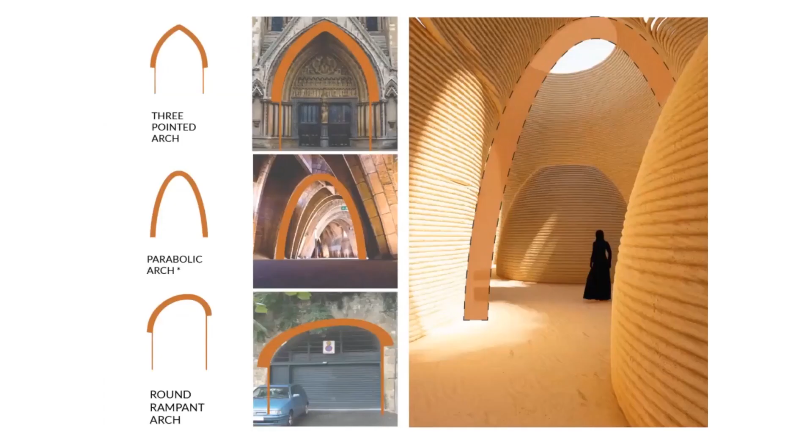What's going on, guys? What's going on? Welcome back, man. So tell us, what does your thesis studio focused on?

We didn't have a really specific focus. Our professor instructed us to really take the opportunity to explore whatever we wanted. For me, I wanted to focus on something that could be used by some kind of nonprofit organization, something to help refugees. That was gonna be my focus.

Sounds like a powerful topic, man. Great. So I titled it The Sahara Refuge, with this quote: trying to translate fine-grained desert sand into a viable building material. This could open up the possibility for a contemporary settlement dedicated to displaced peoples of the Sahara Desert. So that's what it turned into after I refined the idea.

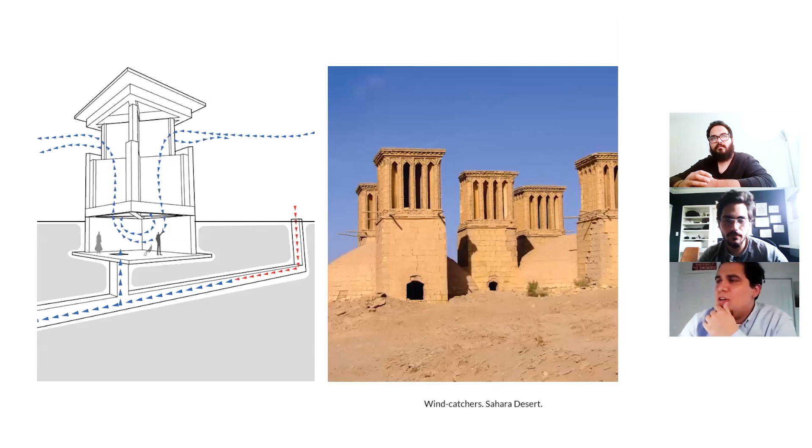This ended up being a form that I tried to emulate, like the primitive structures—how they're focused, built with mud and straw to kind of hold it together.

So this Ocean Sole Africa—he takes flip-flops that wash up on the beach, and he's able to carve them into sculptures, and that turned into a business. He sold them online, got a lot of people involved, so now the community helps him make these sculptures, collect flip-flops, with this entrepreneurial spirit, I guess you could say.

So I wanted to focus on a sustainable material that you could use to create these settlements.

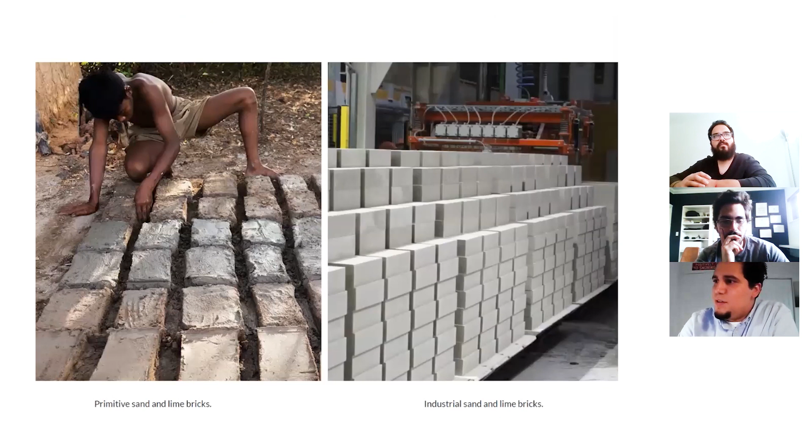In the Sahara Desert, sand would be the most abundant material there. If you look at these primitive bricks, they use sand and this powdery substance called lime, and they mix that together to create a pretty strong enough brick that can give you a simple structure.

That process has kind of been modernized. These factory productions you can see on the right. There's people researching ways to use it. I'd say the issue with the desert sand you find in the Sahara is that it's too fine grained, so it can't really bind well together with any adhesive that you use. It does take a little bit of research to figure out how to use it.

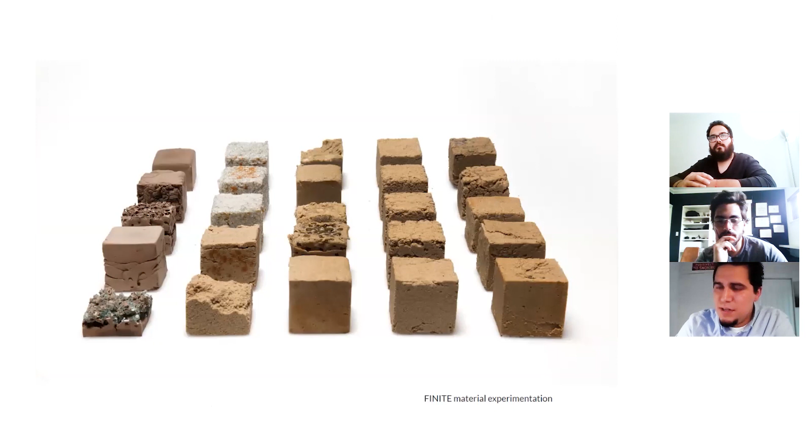These guys have gotten pretty far and I was trying to emulate their process. So I started making these little small samples. These ones here are just sand, water, and lime, and they hold together well.

I ended up doing pressure tests with them to see how much weight they could support. There's this kind of spectrum I set up here to show - on the left, that's just sand, water, and lime. The second one in, I didn't use any water to show how essential that ingredient is. In the middle there are equal parts of sand and lime, which I found to be the most successful.

And all the way to the right was when I started to incorporate cement, because if you're just using sand and lime and water, it can't cure - so if water hits it again, it's going to melt away. That became an essential thing to figure out, how do you get the sand material to cure. In the meantime, I was just using cement as something to kind of keep the experiment moving forward.

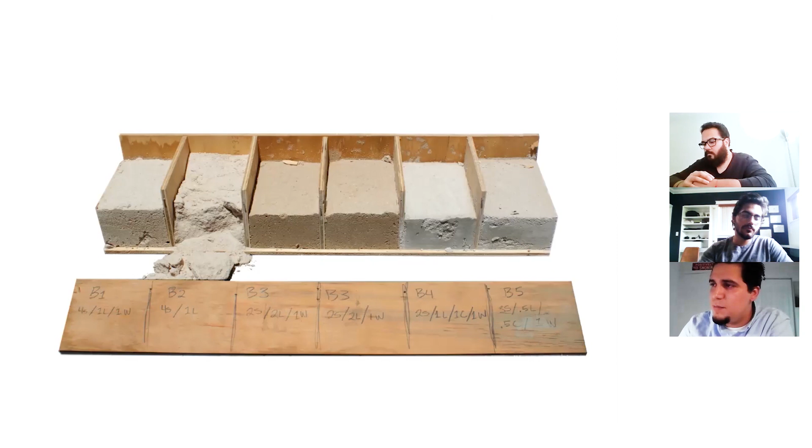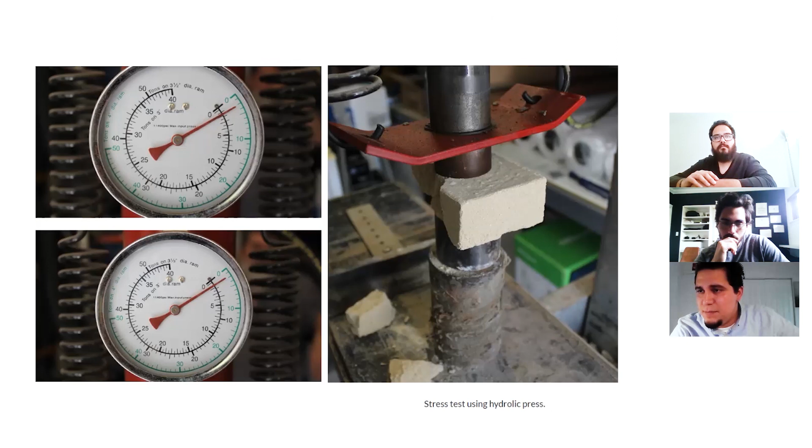So I did these pressure tests. We had a hydraulic press at the studio, so I was able to use that. And even the sand and lime solutions were able to support more weight than I suspected. I think I didn't write it here, but at this gauge you can kind of see it was getting up to a couple tons, if I'm reading it right. So that was a shock to me.

Some details of that, and I kind of broke it down. I think I explained this in depth during the presentation, but I'll go over it now.

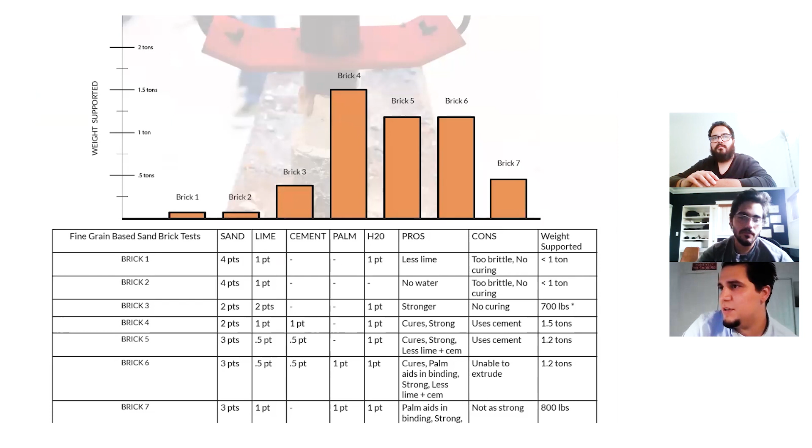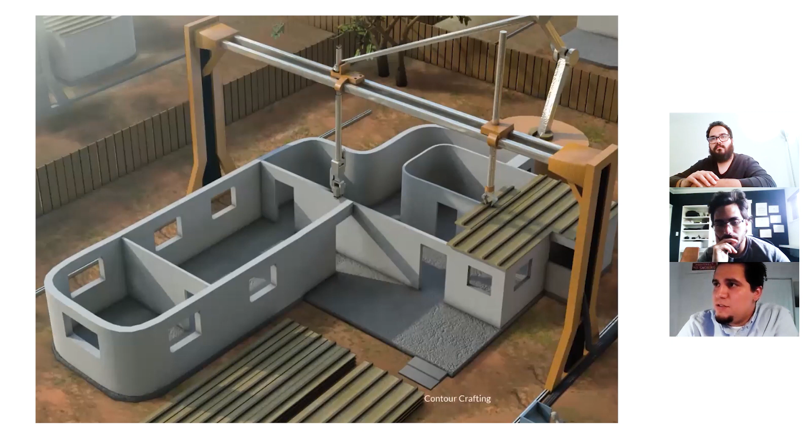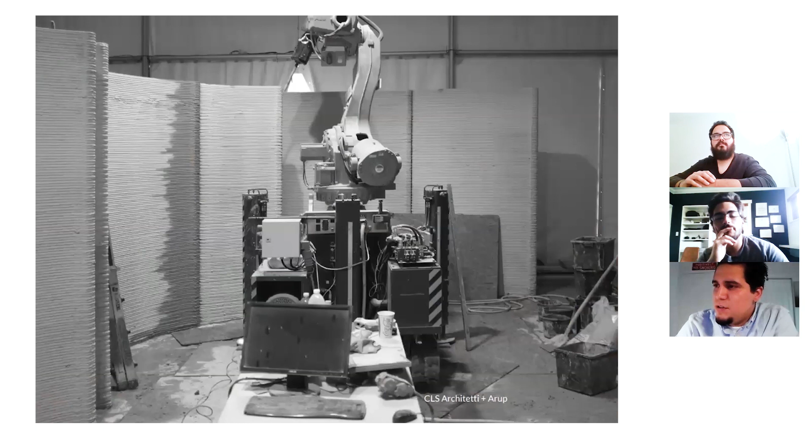So I looked at robotics and construction as a way to use this material, as a way to actually construct these settlements. I looked at a lot of people who are pushing this robotic construction forward. These contour crafting guys have these large industrial scale printers and manufacturers, so I have a lot of research going on in that. This is an Italian group that used robotic arms.

They were able to produce this structure in only 7 days, so these can actually be put together pretty rapidly. And at a sufficient size, 100 square meters, that's enough for maybe a couple people or a small family.

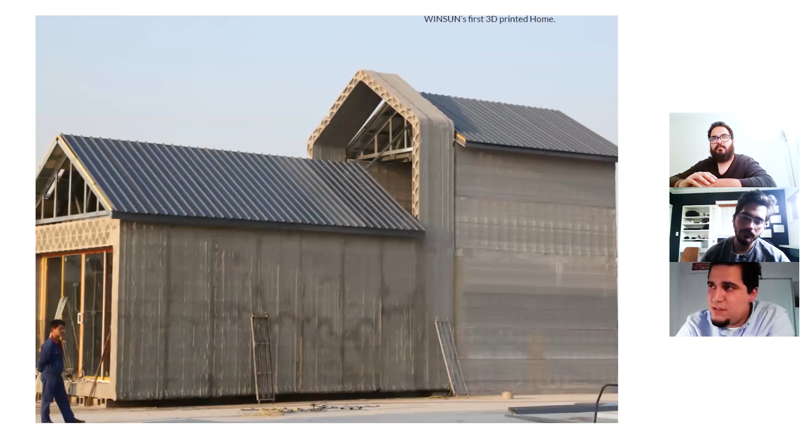This is a Chinese company that was starting to 3D print houses, and they've gone really far. They're doing townhomes, whole communities in a few months. There's a lot of progress being made there.

So I broke it into two options for the plan: you take the sand and whatever adhesive you settle on, combine that with on-site industrial scale robotic fabrication, and then you have your shelters. Or you could fabricate these off-site in factories as segments, and then use robotic construction to put these prefabricated elements together on-site.

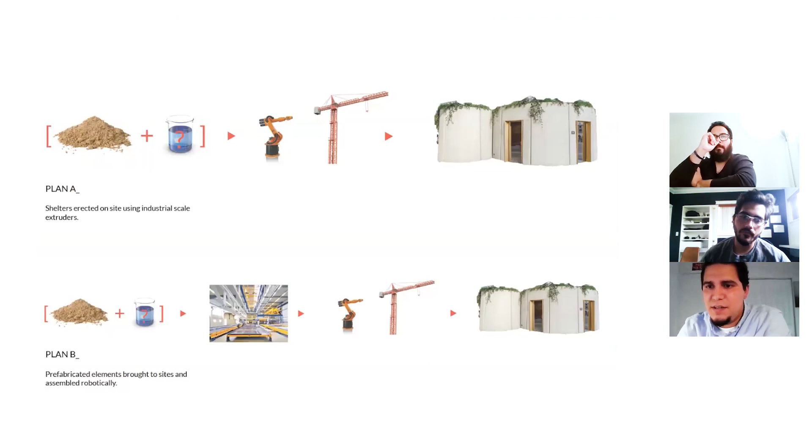So this was kind of the image that started to reflect the settlement - something that could be robotically printed and start to create an environment where small ecosystems for landscaping and agriculture, craft can kind of be housed.

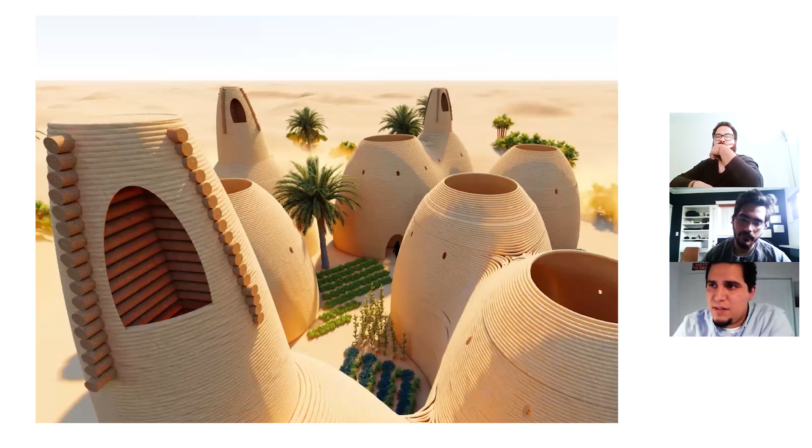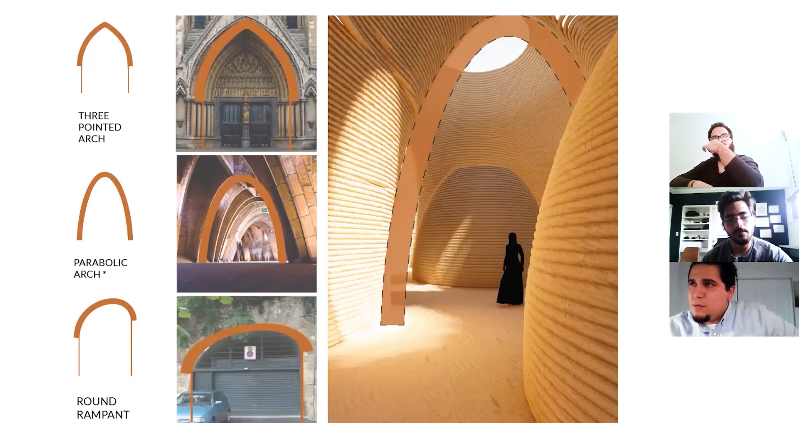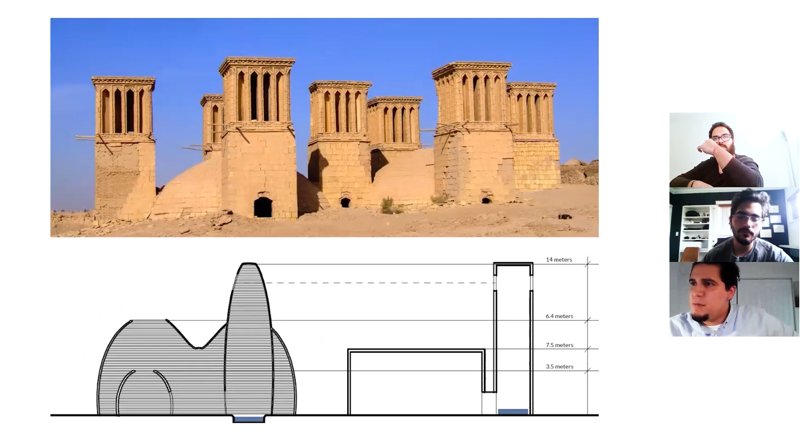I was looking at structurally how these things would work, incorporating different forms of arches that can come together to support these things, and then tying back to these wind catchers, trying to maintain the scale of them and how they work.

To show a few diagrams, at the bottom right you can start to see how that cooled air is coming up through the ground and the hot air coming down and cooled through the towers.

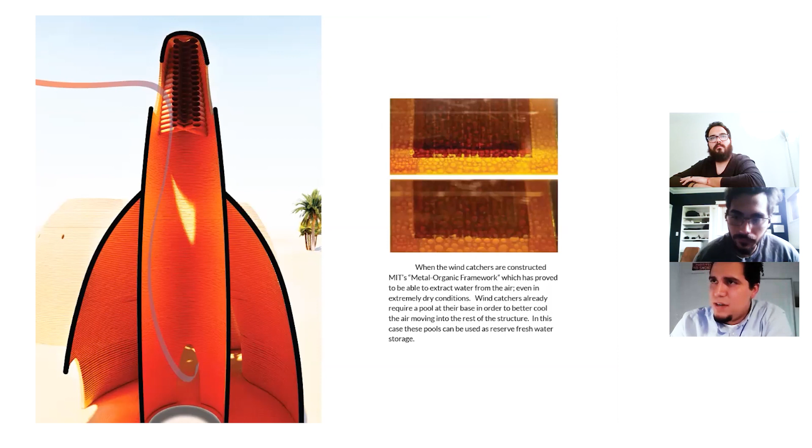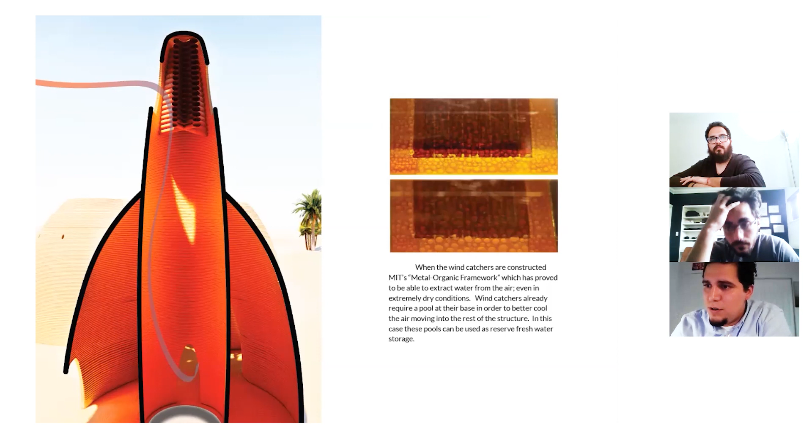I was looking into different materials that are able to absorb water from the air. If you're in the desert, water is an issue. If you have this air coming down, even though there's little humidity in it, you're still able to capture water, maybe store it at the bottom and start to create these reservoirs.

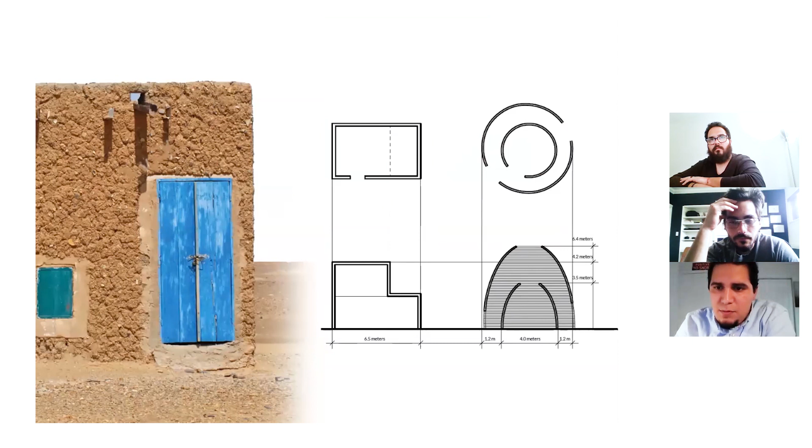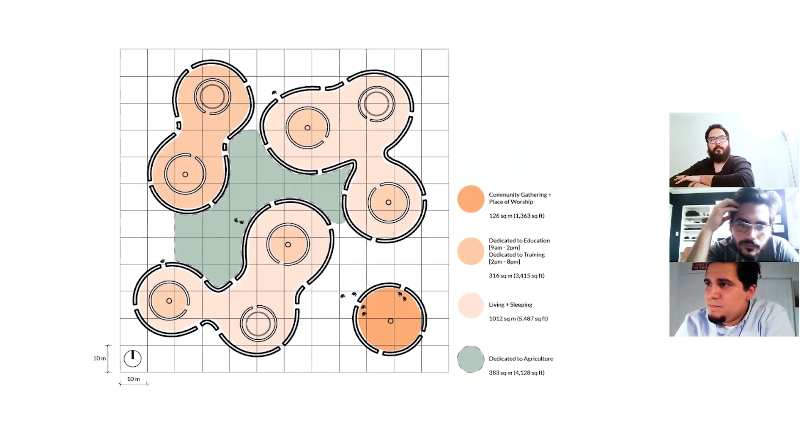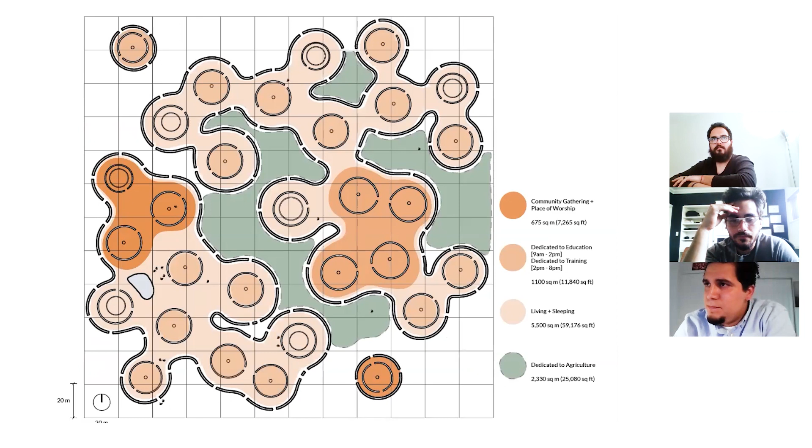I wanted to focus a little bit on the scale of these things, lining up with the scale of a home, scale of a person, and then just really quick diagrams of how these things could be laid out—dedicating space for gathering, places of worship, education, living and sleeping, craft, things like that. If you start to scale it up, how these things can start to be formed.

I think I finished up with just a few shots of how the community could work, and there was this one diagram here that starts to explain how this thing can be sustained economically.

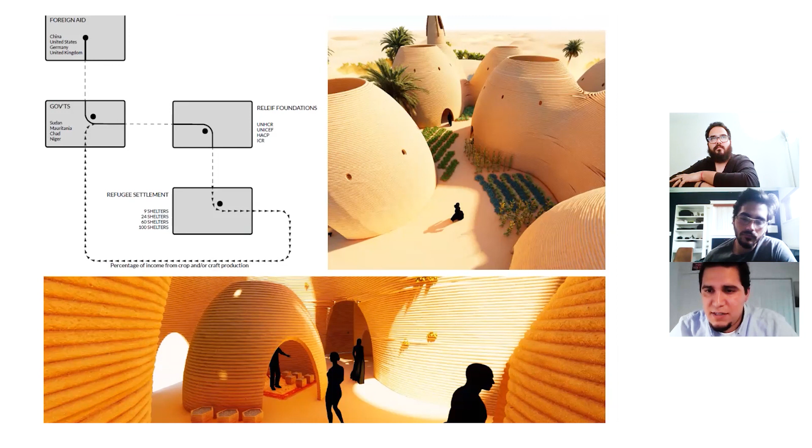So say you have foreign aid from the developed nations coming to the nations that may need support. They can then distribute that to relief organizations, and that could be distributed to the shelters. At the shelters, they can use craft agriculture to raise money to support themselves and give back a percentage to the government. I think that kind of incentivizes both sides to keep the system working.

And I think that's where I ended, with a couple shots of the settlement.

That's great work, man. Yeah, man. I think you have a very powerful project, tackling this very delicate topic of helping out refugees and thinking of formulating a way to create housing for them—something that, like you said, the high-end countries of the world are kind of turning a cold shoulder to. Your whole business plan and the level of research and quality of research, especially for an educational project, I think it's magnificent to see.

Thanks, man. Appreciate it. You spoke on the initial interview we had with you about how your initial focus or your focus and end goal within architecture was kind of based in community, and it culminated into a similar urban planning idea, and it really shows in your thesis, man.

I think from the research, like Ramsey said, to the cultural elements, to understanding really how to lay out a living, working, breathing environment for a completely different culture than what you're used to, is something that's very nice to see, man. It's really great work.

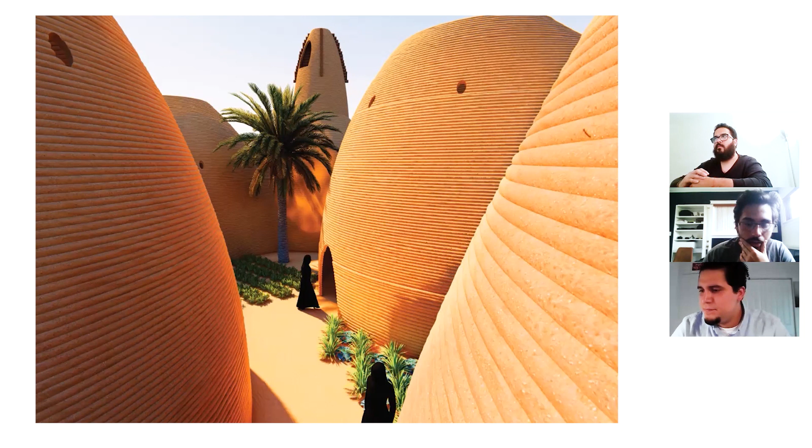I think what you're doing, the fact that you're bringing in modern technologies but still maintaining these customs that a lot of these countries have—that some of the world might see as primitive or as having not altered in decades and centuries—I think it's a beautiful mixture between modern technologies and old customs. And I think this project does a great job at showcasing how successful that can be.

But thank you, man. Thank you for sharing with us. I hope anyone currently in architecture school or thinking about doing their thesis can look at this project as an example of a viable option and a very strong subject to study, and try to see if they can find a different solution.

Thank you, man. We appreciate it. Yeah, of course. Thanks, guys. Thanks for having me. Anytime.